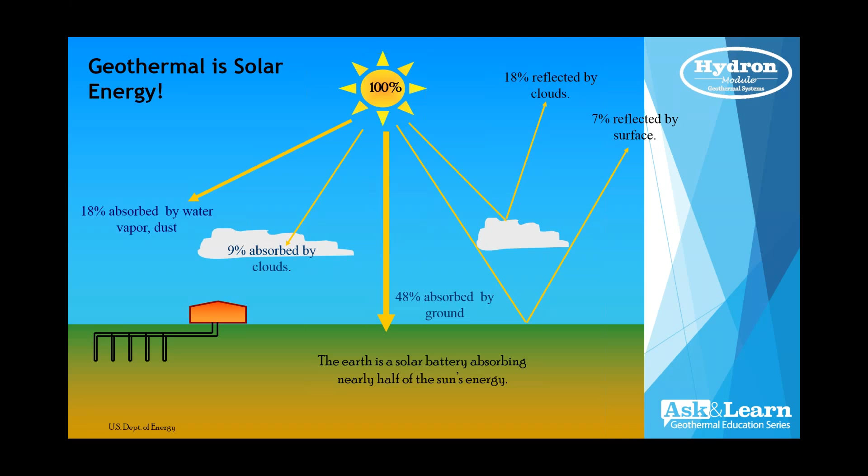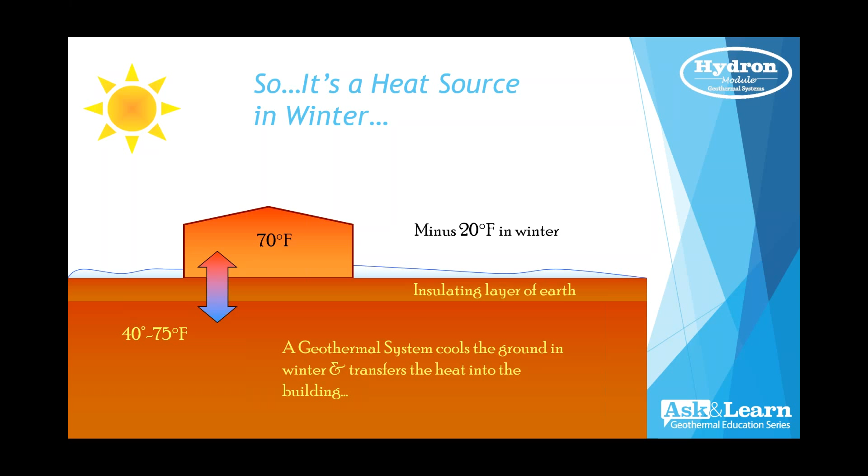So rather than in the wintertime trying to heat your home from minus 20, we're going to heat your home from somewhere between 40 and 75 degrees. Naturally, heat always moves from hot to cold, so the lift to take that energy and put it into the home takes much less energy than if we were to do it from minus 20 degrees. And like I said, it also works in the summertime.

And you can see that throughout the country, and I'll show you another map here shortly, that the ground temperatures are very stable, very even, and very close to the comfort level temperatures that we need in our home, which makes it much easier and more efficient to be able to heat and cool throughout the year.

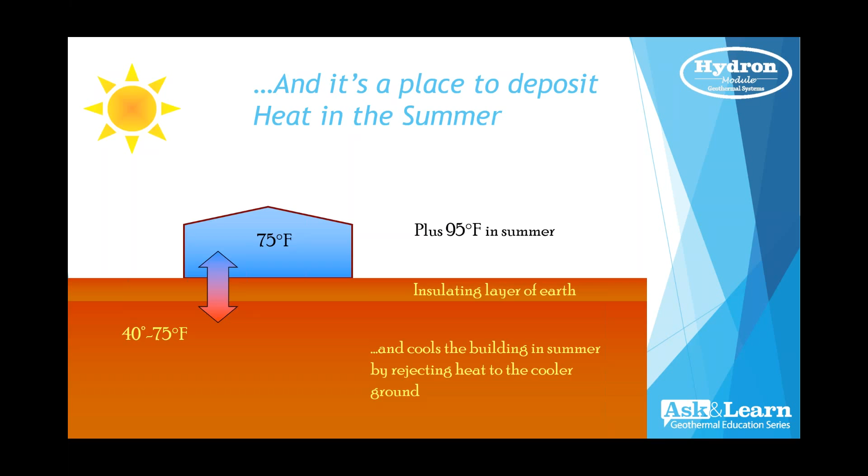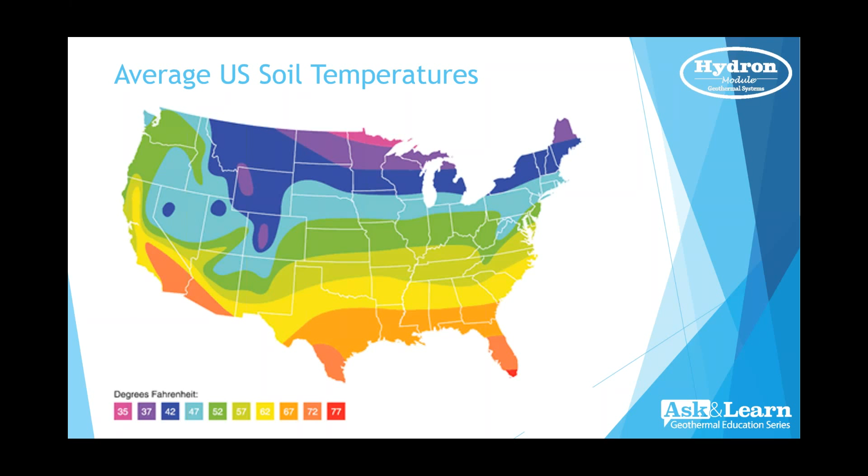So as you can see, you go farther south, the average ground temperature warms up because your average air temperature is much warmer as you get closer to the equator. The further away that you get, ground temperatures cool off. But the great thing is those temperatures are still within the range of the geothermal system's operation point, and also much closer to the comfort level that we need in our home, which is generally around 70 degrees.

So the key really to the system is we have to be able to take that energy that's stored there by the sun. We have to be able to transfer that energy into the home. Or in the summertime, we have to take it from the home as the sun's warming the home and the internal occupants are warming the home, and we have to deposit it out into the earth. So we need a means to do that, and that's where the ground loop comes in. This is really the heart of the system.

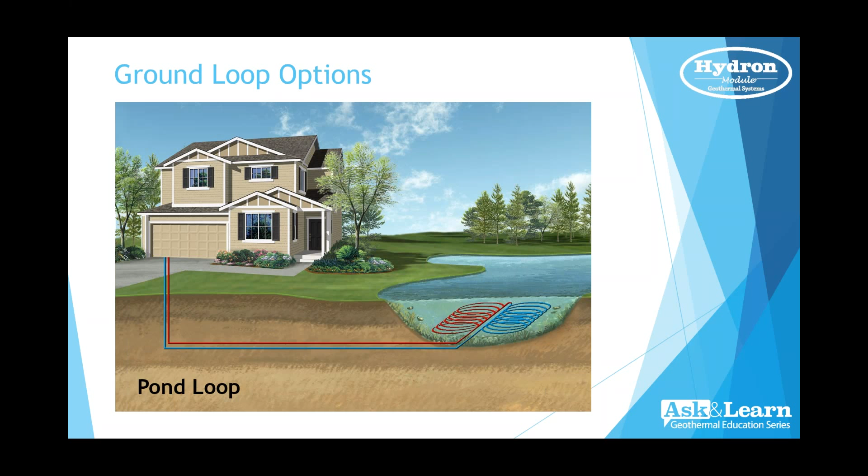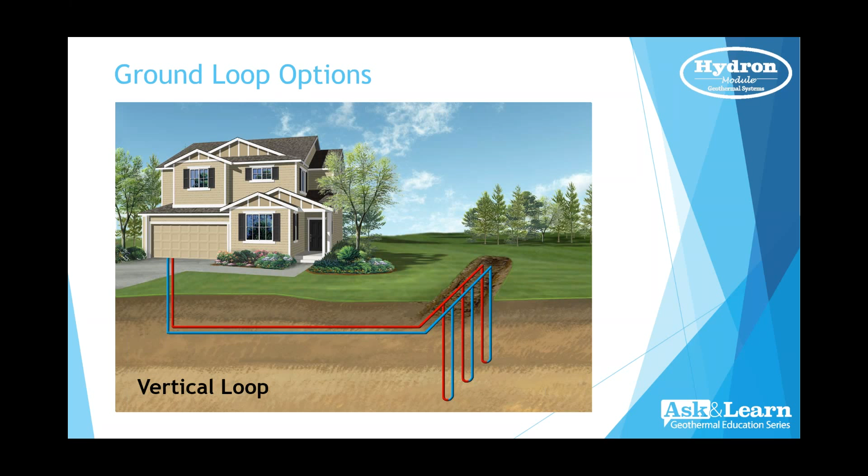And the last one we're going to cover is the vertical loop. This is generally for the more suburban areas where you don't have a lot of property, maybe a quarter of an acre to a half of an acre, and now we're going to drill vertically into the ground with some type of a drilling rig, somewhere between 100 to 250 feet, depending on the soil conditions and how much heating and cooling we need. And again, all these systems will be buried at about 5 to 6 feet, so you don't see anything when everything is finished. And now you have an energy source all year round for your geothermal system.

Why would I choose one over the other? Again, we have 3 different options. Well, it really comes down to space, land availability, your region, and then economics. What does it cost? They all perform equally if designed and installed properly.

Hey Brian, wouldn't you say that vertical systems are most popular? Yeah, it's a good point, Kyle. Vertical loops are definitely the most popular, but I would say it's very close to the horizontal loop. In rural applications, with the horizontal loop you've got a little more space and it costs a little bit less, so we tend to see that more often. The vertical loops are going to be where more people are, which is your suburban and urban areas, and of course all of your commercial applications would generally be a vertical loop.

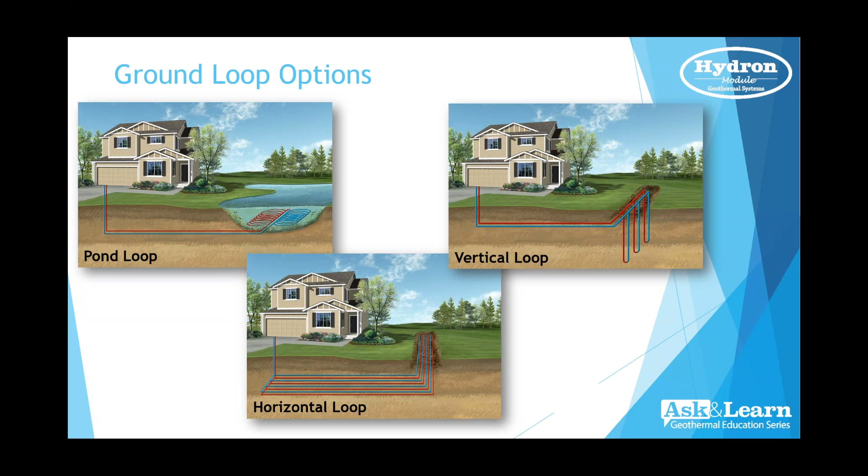Okay, so let's look at the overall system and the components and a little bit about how it works. So now we've got the loop in the ground. We've also got a geothermal heat pump unit that's inside the home. And then we've got some small pumps that circulate the fluid. The fluid is a water-based fluid, possibly water and antifreeze, depending on your region.

The further north you go, your loops get a little bit colder because of the design temperatures and the ground temperatures, and so we add antifreeze. But it's a very basic system, and this is all it takes to do both heating and cooling with a geothermal system for your home or building.

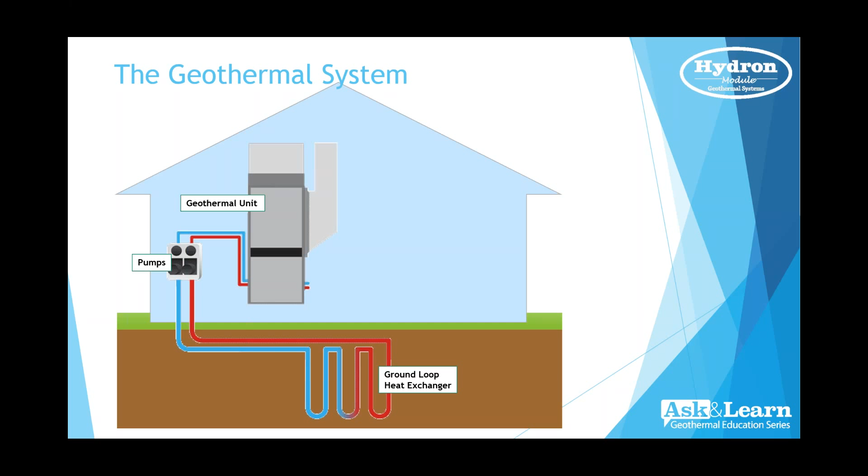So what about my home? How does it work? Where does it work? Different applications. Really, geothermal is scalable, so it works in all sizes, and it works for both new construction and retrofits or existing structures. If we look at homes, it's a great time to do geothermal when you build a new home, primarily because of the financial aspect. When you can roll it in your mortgage rather than paying for it all up front, it makes a lot of sense to do it up front. But certainly existing homes are a prime candidate for geothermal.

So really it boils down to, do I have enough space to put a ground loop in? And then what type of heating or cooling system do I have? And can I match up the system that I would like in my home? So do I have radiant floor? Do I have a ducted forced air system? Maybe I've got a boiler with radiators or baseboard radiation. So those are all things that have to be looked at, including things like your electrical service and other things that may or may not have to be upgraded. But it works great for all applications when it comes to residential.

And again, it works from small homes all the way up to large homes. We've done homes that are less than 1,000 square foot. We've done homes that are net zero and very energy efficient, built with ICF technologies. So we can scale this down to meet any small, highly efficient home application. And we've also done homes well in excess of 6,000 square feet, older homes, farmhouses, new homes. So large and small, new and old, geothermal works for everybody. Again, it boils down to really land availability and just the right application. And of course, energy costs also do play a factor.